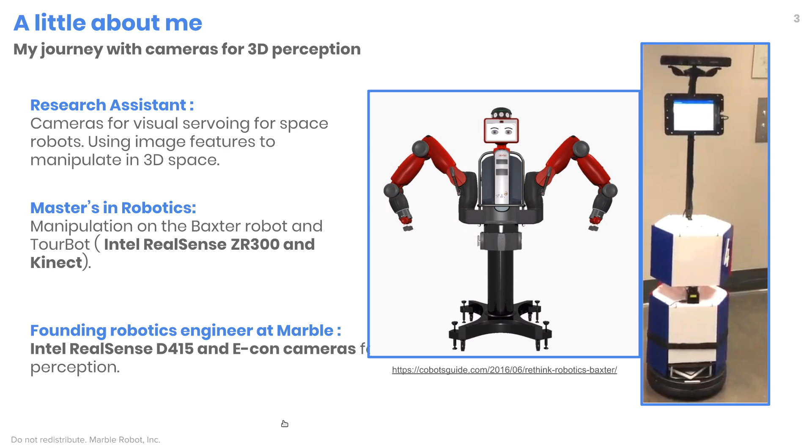It was there that I was first introduced to the Intel RealSense, namely the ZR300. We had to choose between the ZR300 and Kinect, and we obviously chose the Kinect, mostly because we had a lot of trouble configuring the ZR300. So about a year back when I joined Marble, they handed me the RealSense D415 and told me, you've got to make this work for sidewalk autonomy outdoors. I was a bit apprehensive about it, but this talk will basically clear out how wrong I was about the D415s.

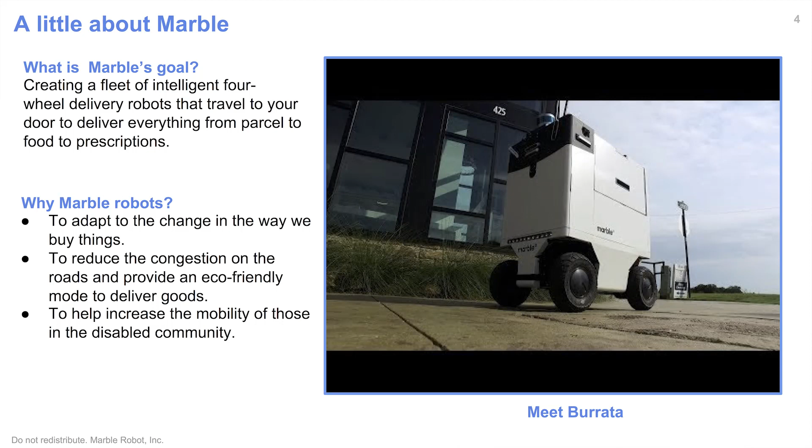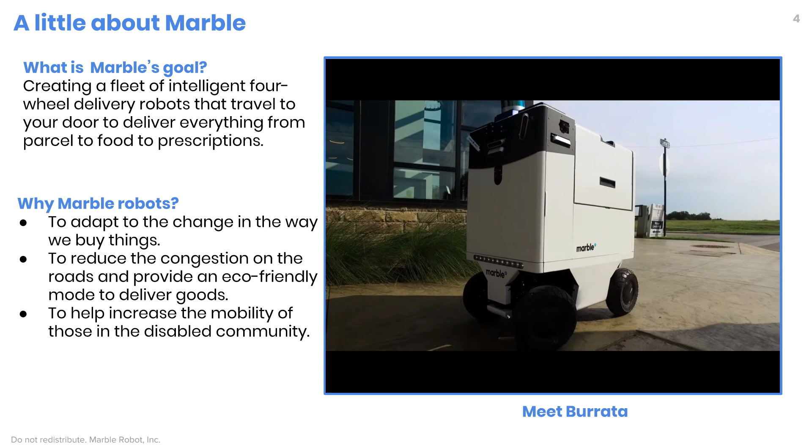So a little bit about Marble. This is our robot, Burrata. We're a big cheese company - we love cheese, we name everything with cheese. So this is Burrata. What is Marble's goal? Our goal is to make intelligent four-wheeled robots that are able to drive autonomously on sidewalks and deliver stuff from parcel to food to prescriptions, you name it.

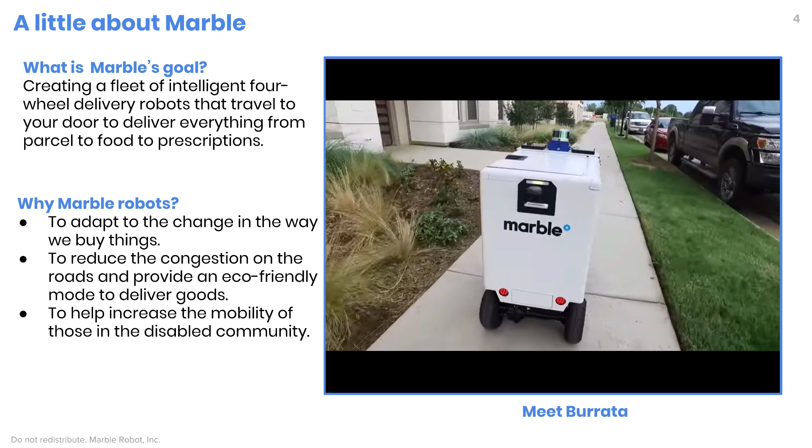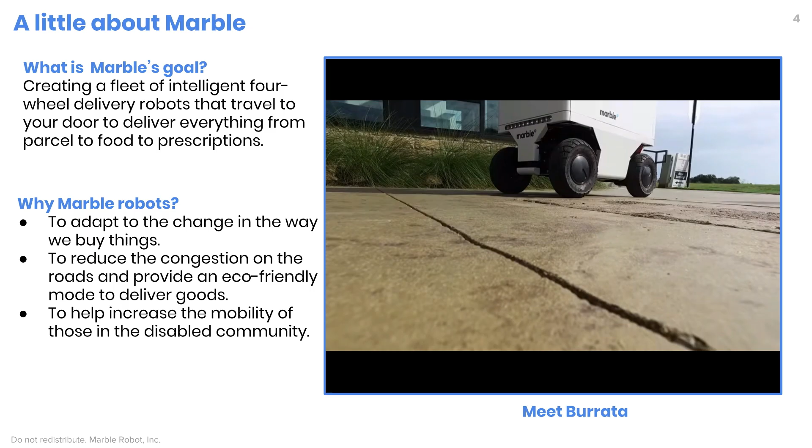But you might think, why do we need a sidewalk robot? The main answer is to adapt to the change in the way we buy things. About 20 or 30 years back, people used to drive to stores to buy their goods. Eventually, with Amazon, that changed to waiting for a week for your package. And now deliveries are wanted in a couple of hours. This would essentially mean delivery companies would be pumping out more trucks to deliver your goods, which would mean pollution both in the noise sense and the air sense.

So we want to provide an eco-friendly alternative that can do that. And of course, we also want to help those in the disabled community, and also busy parents who can't afford to make that 1 hour or 2 hour trip to the nearest store.

What problem are we trying to solve? We're trying to solve the problem of a better last mile. And these are our core principles. We want to make it accessible.

We want the local grocery store to be able to compete with the big market stores. And we want to provide them the ability to do that, to be able to deliver to their customers around them. We want to ensure security. We want to ensure that when your parcels go from point A to point B, they reach them, and nobody's able to pick them up in the middle.

We want to be reliable. We want to ensure that your stuff gets in time, and we want to ensure that we make those 2 hour marks that you need.

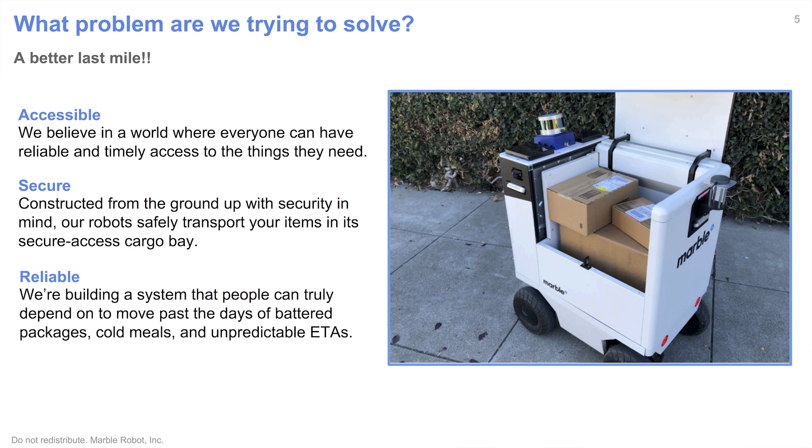We strive for safety. We are trying to achieve sidewalk autonomy after all. So we want to ensure that we're safely bypassing pedestrians, and we're taking into account everything that's around us. And for that, we ensure that we're testing and evaluating our systems.

The most important part in achieving that goal of sidewalk autonomy is the sensors we use. The sensors become critically important in that sense, and we achieve that through 360-degree vision. We've got E-con cameras, which are simply RGB input cameras around the robot. We've got about 6 of those, which enable remote teleop operators to see and give us RGB data about what is there around us.

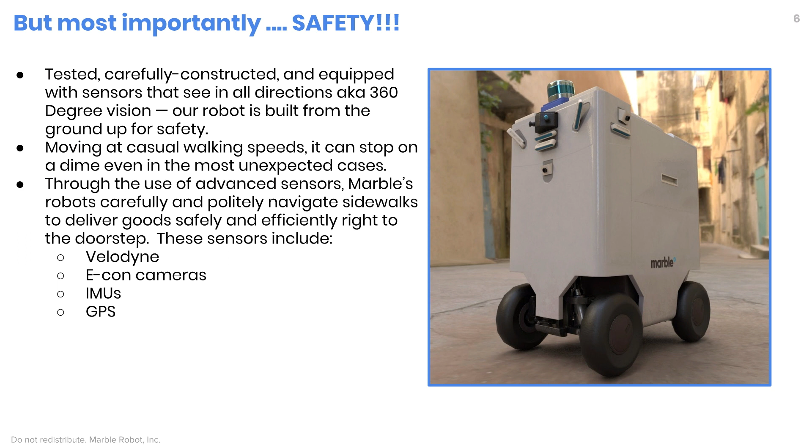We've got a Velodyne, which you can see right on top, which is a VLP16 LiDAR with 16 scans, and we get depth information from that. We get very high precision depth information from that. We of course have IMUs and GPS, and of course we have the RealSenses.

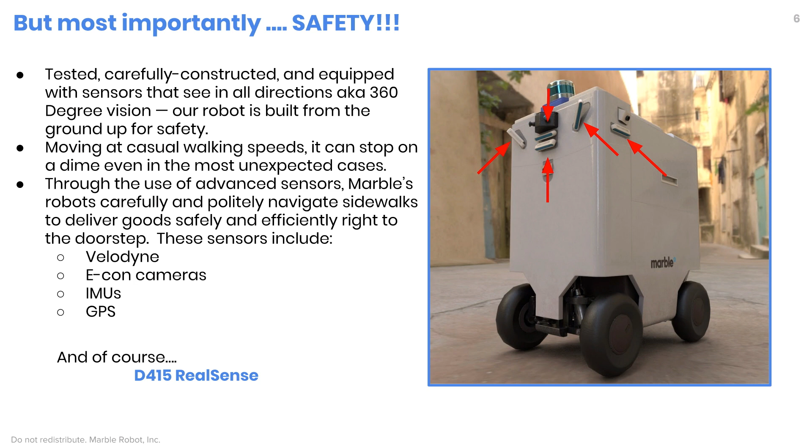We actually have 7 RealSenses on board. The front 4 RealSenses are the most important ones because they play a very important role in our forward driving capabilities, and they're named the left forward, right forward, the front forward which is tilted up a bit, and the front down RealSense. There's also a left, a right, and a RealSense at the rear. Those help us find obstacles coming from the side or from behind, and help us keep track of that.

So what are the differences between them? Computation power — autonomous cars have a ton of compute power. We have very low compute power, and that means we need to really think carefully about which algorithms we implement, how we implement them, and which sensors we use. All of this is determined by that. We can't just use high-density LiDARs everywhere because we wouldn't have enough compute to process them.

Robot design. When you think of a vehicle that needs to operate on the road, you're obviously going to think of a car, so they can use cars as a base and build on top of that. Our hardware team had the challenge of designing a vehicle that could navigate on sidewalks, was easily visible, and wouldn't be cumbersome in a way that pedestrians might find awful to deal with on the sidewalks. So they had that design challenge.